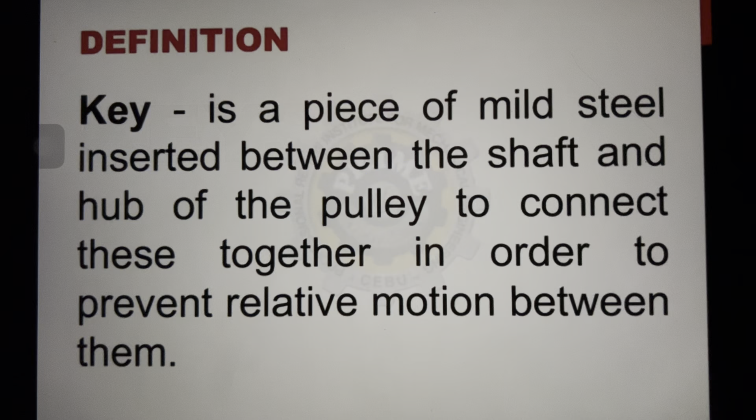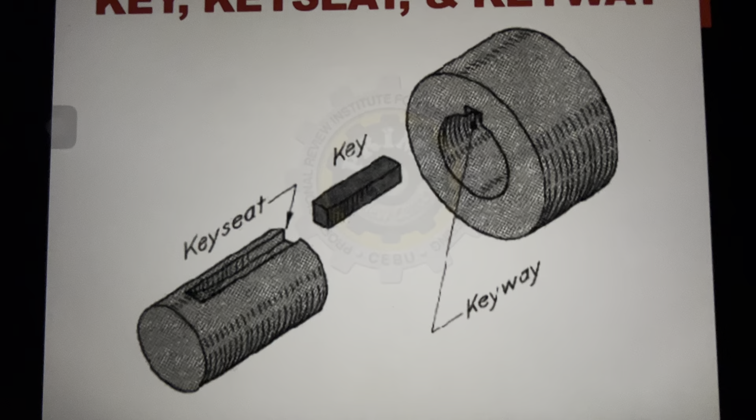By definition, a key is a piece of mild steel inserted between the shaft and the hub of the pulley to connect them together in order to prevent relative motion between them.

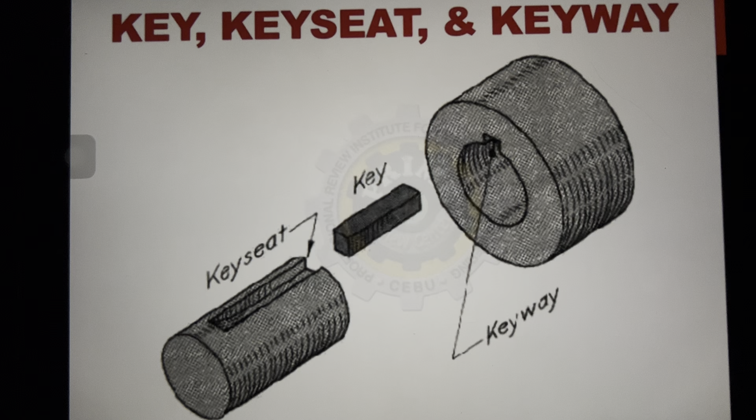So what does a key look like? Here we have the shaft, like this. And then we have here a pulley. So for us to have a connection between those two, we have a key, which is a small piece of steel.

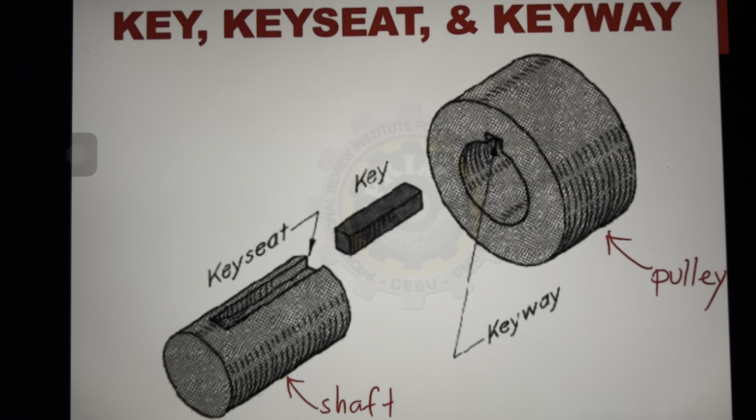Since our shaft key rotates, it is subject to torsion. If there is torsion or torque, there is force. If there is force, there is stress. So our key is subject to different kinds of stresses. Let's visualize those stresses.

First, the key is subject to shear stress. Since our shaft rotates, it is subject to shear stress. Let's show the shear stress on the key.

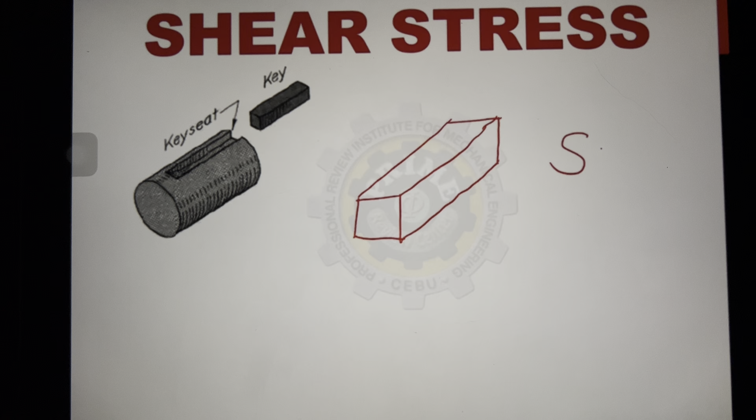Let's say this is our key, and of course, our shafting rotates. So we have stress, which is the formula of force over area. Our key is subject to a force, and here are the forces.

Of course, we know that for shear stress, our force acts parallel to the area. Our key has dimensions: this is the width, denoted as B, this is the thickness, and this is the length. So which area is subject to shear stress? The one that will be sheared will be parallel to the forces.

So that is our area parallel to the forces, and that is a rectangle. What is our area? The area will be length times width, which is the area to be sheared.

How do we get the force? We have torque, and torque is force times radius, which is 1/2 of the diameter. If we cross multiply by 2, the force becomes 2 times the torque over the diameter. Let's place this force and this area.

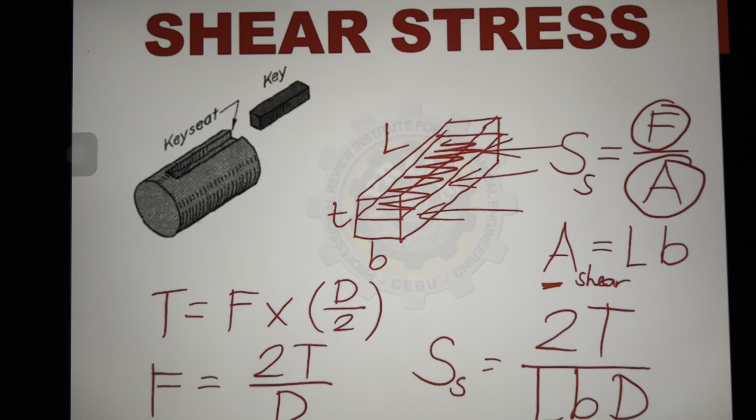Let's put this area here. So our stress will be the shear stress. The shear stress will be the force, which is 2T over D. And our area is L times B. So our shear stress for our key is 2 times the torque over L (length), B (width), and D (diameter of our shaft). This is our derived formula for shear stress, coming from force over area.

Normally, the unit of stress we use is megapascal or PSI.

How about the compressive stress? Since our key is placed in the keyway or key seat, the key gets compressed. What section gets compressed? Earlier we had shear stress. Another type is compressive stress. Again, we have forces here, and our compressive stress is an axial stress, meaning our force acts perpendicular to our area.

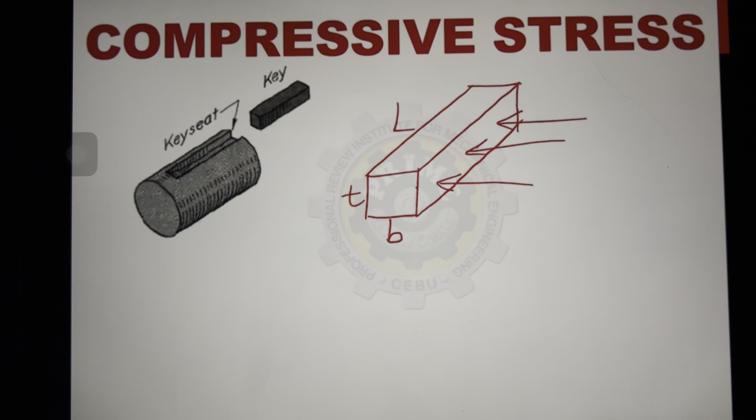Using the same dimensions, which section is compressed? Which part gets pinched, or which is subject to compression? This is it. What is that area? We put it in stress equals force over area. The area subject to compression will be this, still a rectangle.

What is this section? It is half of the thickness. So that is 1/2 times thickness times length. That's our area subject to compression: 1/2 times length times thickness.

And of course, we derived earlier that the force is 2T over D. So our compressive stress will be: what is our force? The force is 2T over D. And what is our area? The area is 1/2 length times thickness. So it becomes 2 divided by 1/2, which is 4. That will be 4T over L times t times D.

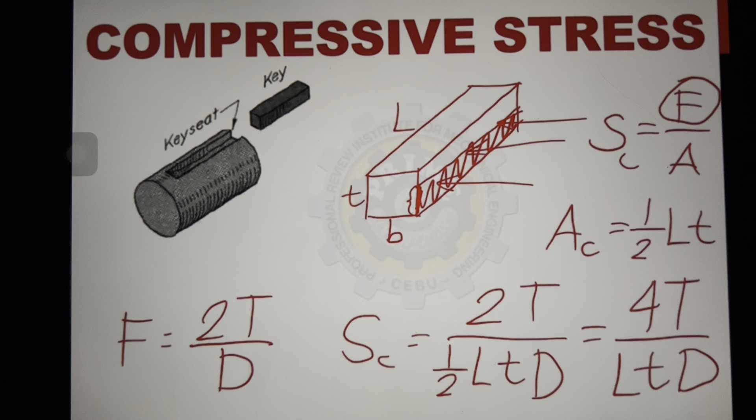That is our derived formula for compressive stress. Still, T is the torque, L is the length, the small letter t is the thickness, while the capital letter D is the diameter of our shaft. This is our compressive stress for the key.

So, let's remember these key calculations.

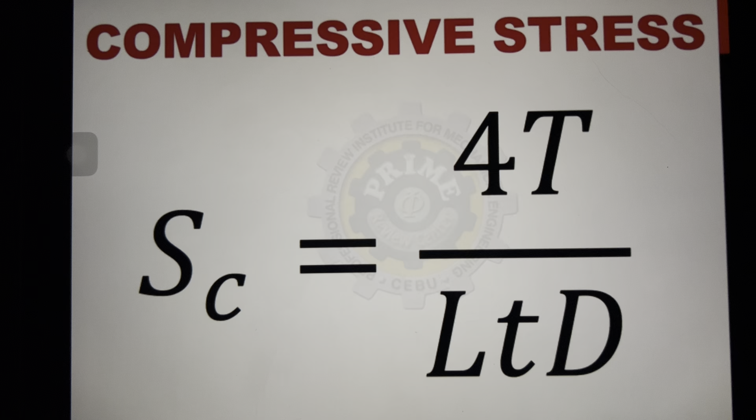Let's try these problems. A 4 inch shaft using a flat key whose width is 1 inch is transmitting a torque of 63,000 inch-pound. If the design shearing stress is 5,000 psi, find the safe length.

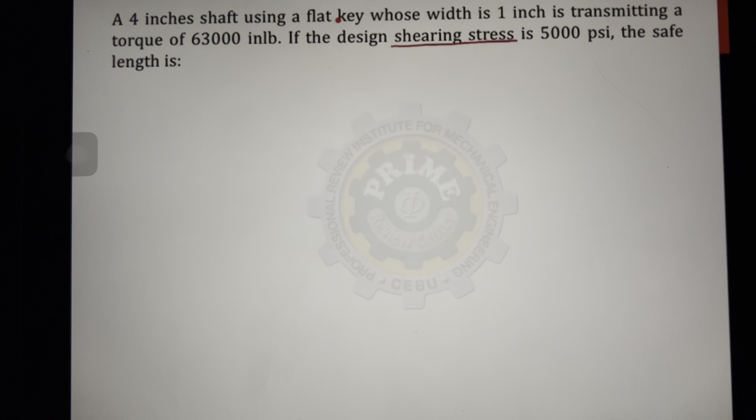So, given is the shearing stress for our flat key, and our formula is 2T over LbD. Let's plug in our given values.

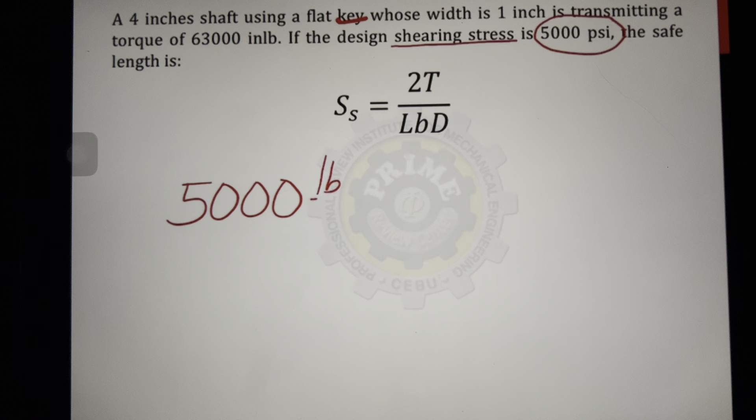Our shear stress is 5,000 psi, equivalent to 2 times the torque, which is 63,000 inch-pound, divided by the safe length, which is our unknown, times the width, 1 inch, and the diameter of the shaft, which is 4 inches.

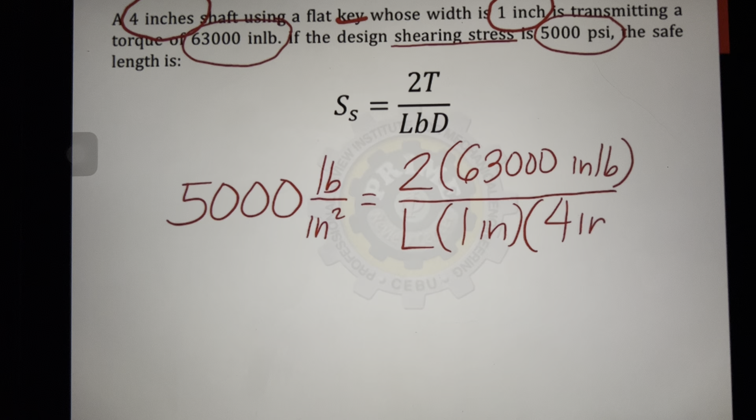Okay, so inch times inch, that is square inches, and pounds cancel. So our unit for length will be inches.

So what is the safe length of the key? It is equivalent to 6.3 inches. That is our answer.

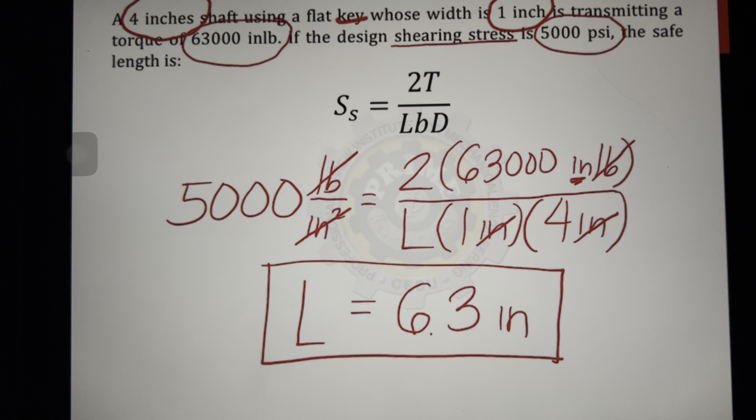Next problem. A 1,200 millimeter cast iron pulley is fastened to a 112.5 millimeter shaft by means of a 28.13 millimeter square key, 175 millimeters long. What force acting at the pulley rim will shear the key if the shear stress of the key is 20.67 kilogram per square millimeter?

Let's show the dimensions. So, let's start with our pulley, which is a cast iron pulley with a diameter of 1,200 millimeters, and of course mounted on it is our 112.50 millimeter shaft.

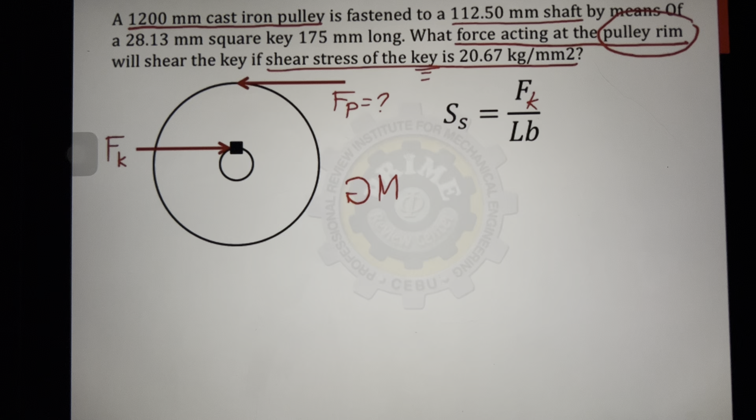So here we can use moment, since our pulley will rotate. So, summation of moment, assuming that all clockwise moments are positive, is equal to 0.

So what are our forces here? We have the force at the key. What is its rotation? It is clockwise here, so this will be positive. And what is our distance?

The distance will be the distance from the center. So how far is this force from our center? This is the radius of the shaft. So this will be the radius of the shaft.

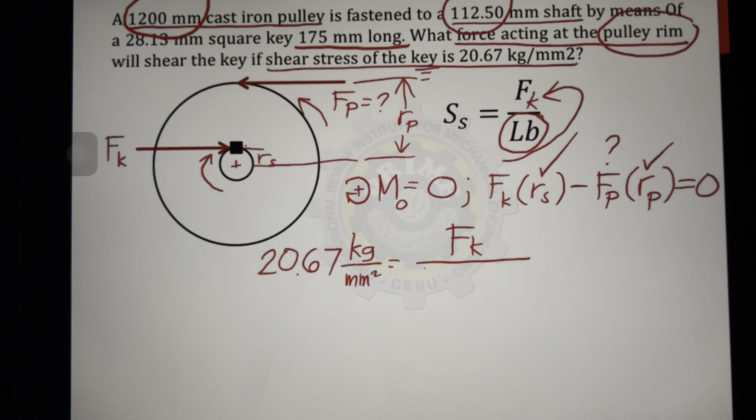So our length is 175 millimeters long multiplied by the width of the key, which, since it says it is a square key, is 28.13 millimeters. So for a square key, the width and thickness are the same, 28.13 millimeters. So millimeters squared cancel.

So our force acting at the key is equivalent to how many kilograms of force? This is equivalent to 101,753.24 kilograms. We can use the moment equation.

So, force acting at the key is 101,753.24 times the radius of the shaft. For the radius of the shaft, we were given the diameter of the shaft, so this is half. Half of 112.50, that is the radius.

And then minus force acting at the pulley multiplied by the radius of the pulley, which we can get here since this is the diameter of the pulley. So half of the diameter of the pulley, 1,200, that is the radius.

And equal to 0. So what is the force acting on the pulley rim?

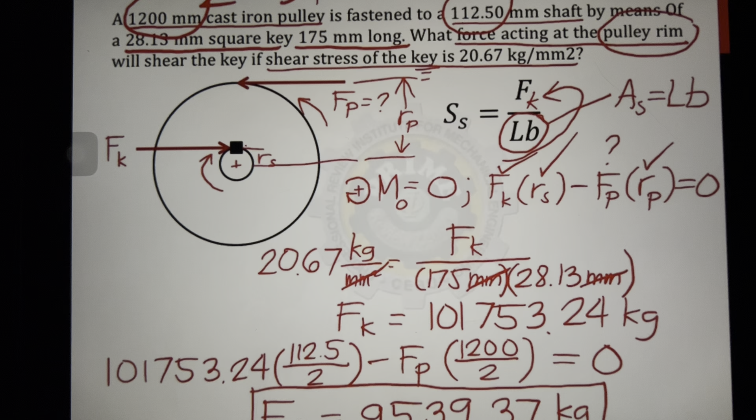Next one, a line shaft with a power of 100 kilowatts at a speed of 1,200 RPM had a rectangular key used in its pulley connection. Consider the shearing stress of the shaft to be 40 megapascal and the key to be 200 megapascal. Determine the width of the rectangular key if it is 1/4 of the shaft diameter.

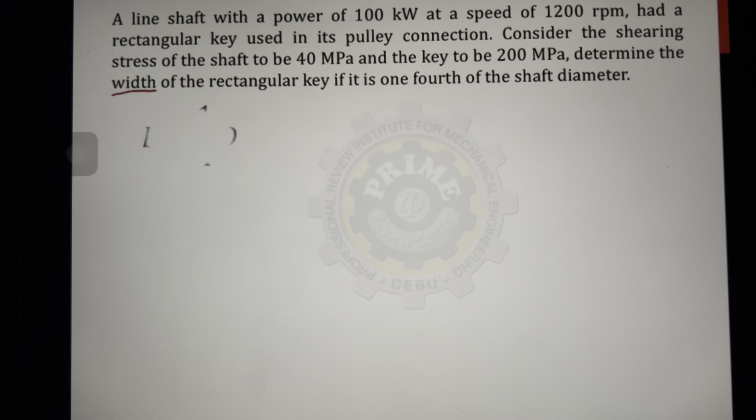So nawawala ay width of the key, which is denoted as B. The size of problem, it is 1/4 of the shaft diameter. Or in equation form, this is B is equal to 1/4 D.

So para masolve ang width, kailangan ko masolve ang diameter. Kasi doon naka-depende ang measurement ng ating width of the rectangular key, 1/4 of the diameter. So saan ko pwede makuha ang diameter ng shaft? Of course, sa stress ng shaft, which is 16T over pi d cube.

So pag nasolve ko ito, masosolve din ang ating B. So dependent ang B sa diameter. Meron ba tayong given na stress ng shaft? Yes, the stress is 40 megapascal. Nawawala ang T, so kailangan ko ng torque.

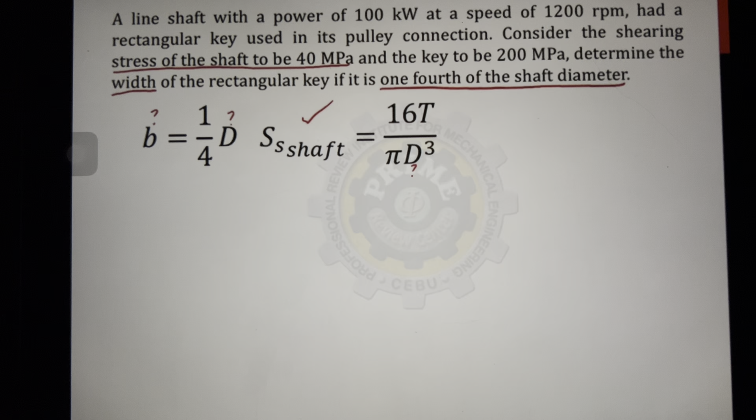So saan ba natin nakukuha normally ang torque? Sa power. Given power of 100 kilowatts and speed of 1,200 RPM, masosolve natin ang torque. So kumain natin isolve ang ating torque. So our power in kilowatt is 100.

Equivalent to N na 1,200 RPM times torque over 9.549 times 10 to the 6. So what is the torque in Newton millimeters? It is equivalent to 795,750. That's Newton millimeters. Since meron ng torque, pwede ko lang gamitin ang shearing stress sa shaft, which is 40 megapascal or Newton per millimeter squared.

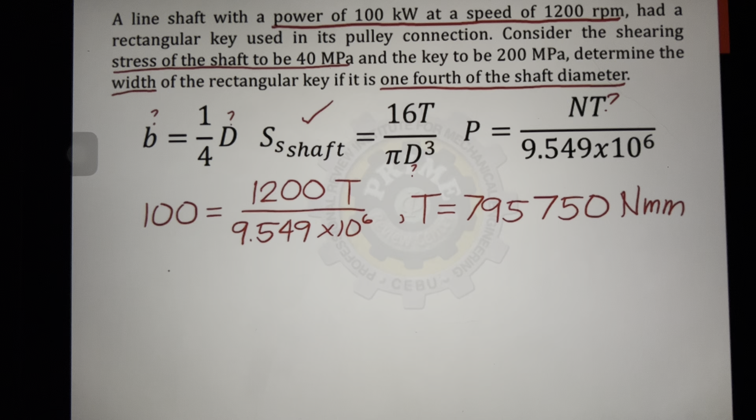It's equivalent to 16 times the torque of 795,750 Newton millimeter divided by pi d cube. Cancel ang Newton, so mm squared times millimeter, that will be millimeter cube. And since ito ay d cube, so cube root of mm cube, that will be millimeters.

So what will be our diameter in millimeters? It is equivalent to 46.62 millimeters. At ngayong meron tayong diameter, pwede ko lang masolve ang width of the rectangular key. And that is 1/4 of the shaft diameter, 46.62.

So what is our width? It is equivalent to 11.65 millimeters.

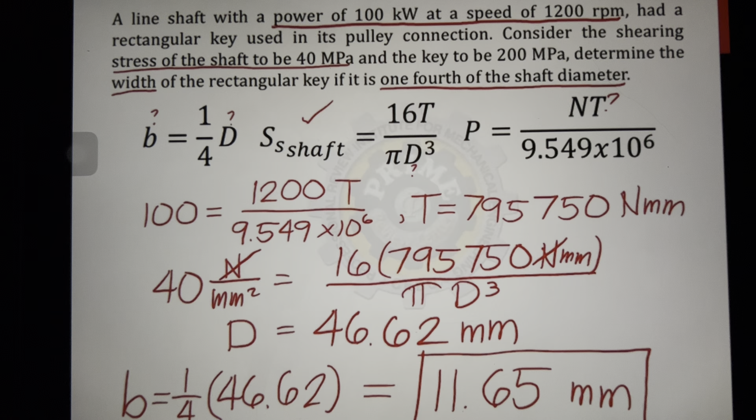Next one, a solid steel machine shaft with a safe shearing stress of 7,000 psi transmits a torque of 10,500 inch-pound. A square key is used whose width is equal to 1/4 of the shaft diameter and whose length is 1 1/2 times the shaft diameter. Find the key dimensions.

So nakita natin mga dimension, which is, ano ba mga dimension ng key? So yun yung width, thickness, and length. So yun ang hanapin natin, yung measurement ng dimension ng key natin. So ano ba mga given?

Una, sabi sa problem, the square key has a width equal to 1/4 of the shaft diameter and length of 1 1/2 or 1.5 times the shaft diameter. So napapansin, ang ating width and length ay pareho nakadepende sa diameter.

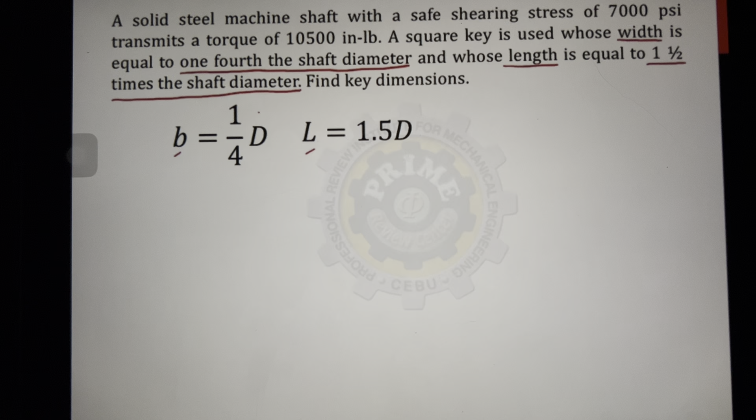So again, ang ating shaft ay may binigay na safe shearing stress. So doon natin kukunin ang ating diameter of the shaft, which is 16T over pi D cube. Meron tayong shearing stress of 7,000 psi and a torque of 10,500. Masosolve natin ang diameter. At once masolve ang diameter, masosolve na rin natin ang width and length.

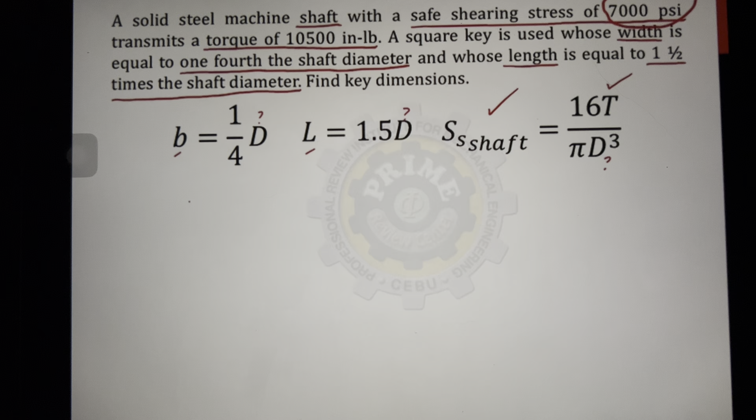So start tayo sa shear stress ng shaft, which is 7,000 psi. Equivalent to 16 times the torque over pi D cubed. Cancel ang pounds, this will be inches cubed. So ang diameter natin ay naka-inches.

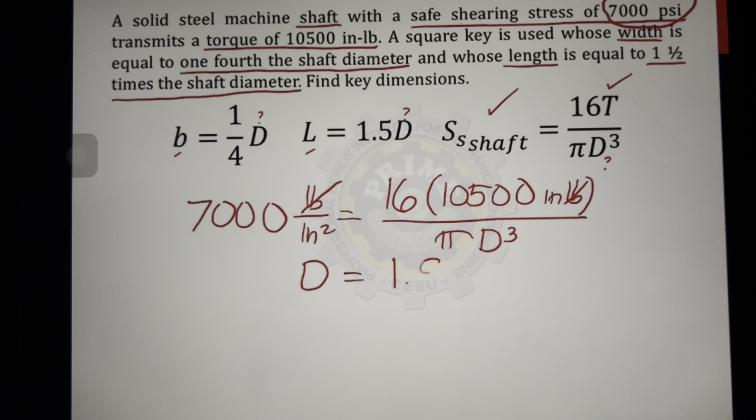So what is the measurement of our diameter of the shaft in inches? It is equivalent to 1.97 inches.

So pwede natin makuha ang width as well as the length. So our width is 1/4 of the shaft diameter, which is 1.97. So ang width natin ay 0.49 inches.

So yan ang dimension ng ating key. Pero alam natin, normally, ang mga dimension, nakadepende yun sa available na sizes of our material. So ano ba yung closest na available sa market size sa 0.49 inches? Alam natin na ang closest na available ay 0.5 o yung 1/2 inch. So yung dimension ng ating key at the width of our key is approximately 1/2 inch.

And another thing, ano sa problem? Ang key na to ay isang square key. So kapag square key, ang ating width ng ating thickness ay iisa. So yan ang cross-section ng ating key. So the width is equal to thickness. So yung 1/2 inch, yun din ang measurement ng thickness natin.

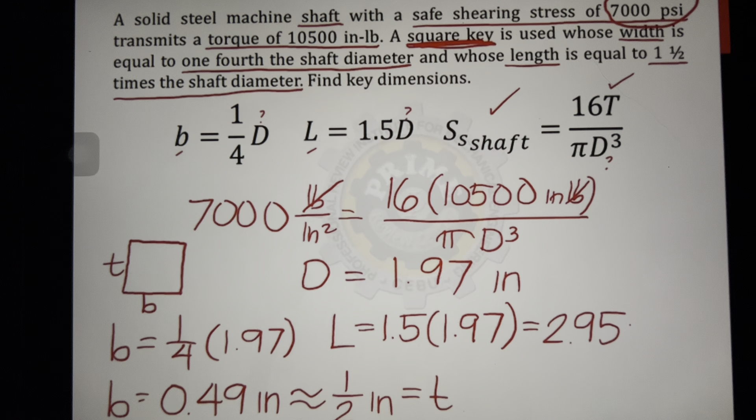So pinakamalapit sa 2.95 ay 3 inches. So meron tayong mga dimension. Start tayo sa width, which is 1/2 inch. And the thickness, also 1/2 inch. And the length is 3 inches. So yan ang dimension ng ating key.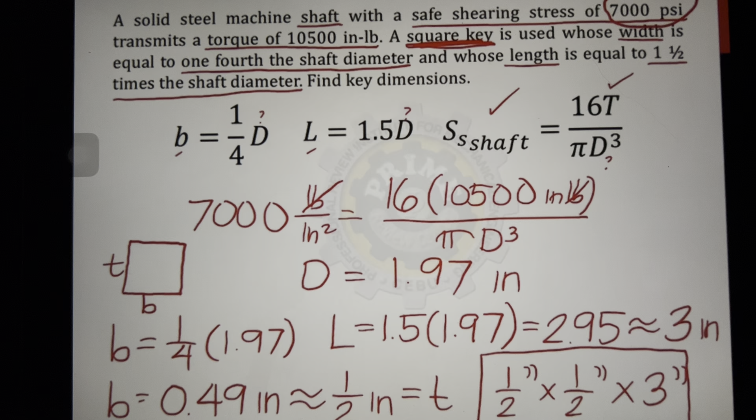Next one, couplings. So what are couplings? Couplings are used in machinery for the connection of shafts of units that are manufactured separately, such as a motor and a generator, and to provide for disconnection for repairs or alterations.

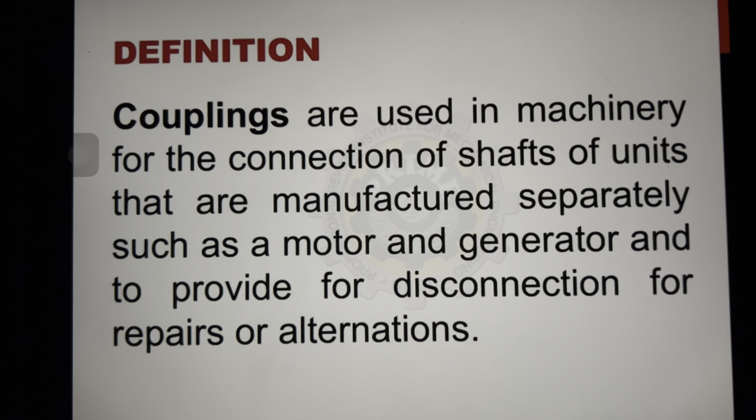Our first one is the shear stress on the coupling bolts. Ano ba yung coupling bolts natin? Let's say this is our flange, ito ang ating shaft, at ito ang ating mga coupling bolts. Kapag umiikot yung ating coupling, subject yan sa stresses.

Start with our shear stress. Alam natin na ang stress formula ay equivalent sa force over area. Since pinag-uusapan natin ang shear stress sa bawat bolt, ito ay magiging force acting at each bolt divided by the area of each bolt.

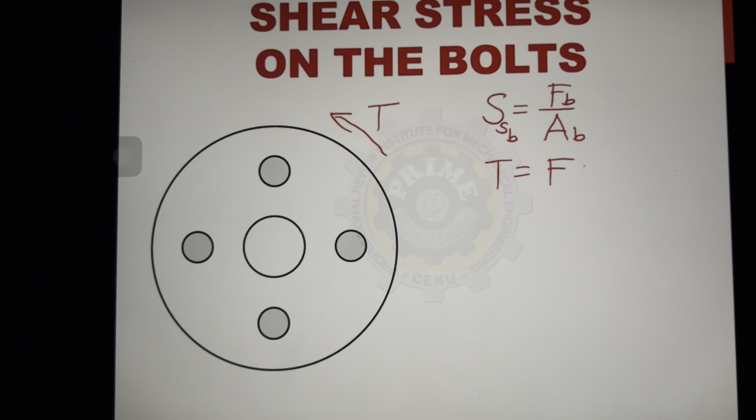I-derive natin. Since umiikot ito, it is subject to torsion. Alam natin na ang torque ay force times radius, o 1/2 ng diameter. Ano ba itong force?

Since umiikot ito, na-apekto lahat ng bolt, kaya ito ay total force acting at the coupling. Ang diameter naman dito ay ang diameter na nag-act sa lahat ng bolt.

Tandaan, ang ating mga bolt ay may sinusunod na imaginary circle, tinatawag na pitch circle o bolt circle. Itong diameter dito ay ang bolt circle diameter, ito yung broken line natin — yan yung ating bolt circle, ang imaginary circle na sinusundan ng ating mga bolt.

Dito, our total force is equivalent to 2 times the torque divided by the bolt circle diameter.

Makakapansin tayo, meron tayong force per bolt at total force. Sabi natin na ang total force ay force sa lahat ng bolt, so paano ko makukuha ang force sa kada isang bolt? Gagawin ko lang, yung total force natin i-divide ko sa number of bolts.

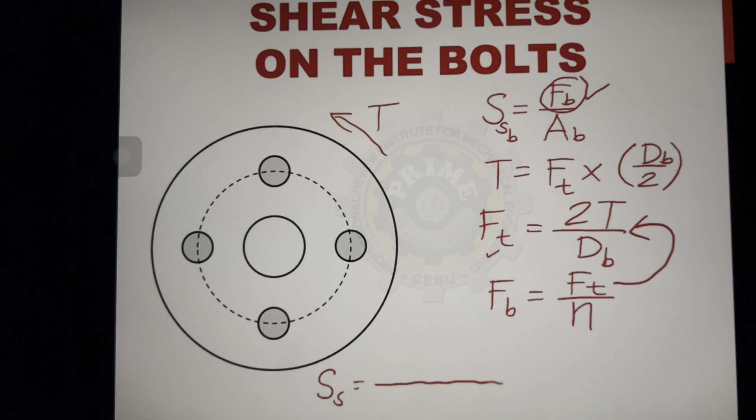Ilagay na natin sa ating shear stress formula. Ang shear stress, equivalent sa force per bolt, ay equivalent sa total force over N. Ano ba ang total force? Ito: 2T over bolt circle diameter, tapos meron tayong nakadivide na N. Yan yung ating force per bolt.

Ano naman ang area ng bolt? Kunin mo ang area ng bawat isang bolt, magiging circle ito, which is pi over 4 times the square of the diameter of each bolt. I-denote natin as small letter d, yun ang diameter of each bolt. So ano ang ating derived formula?

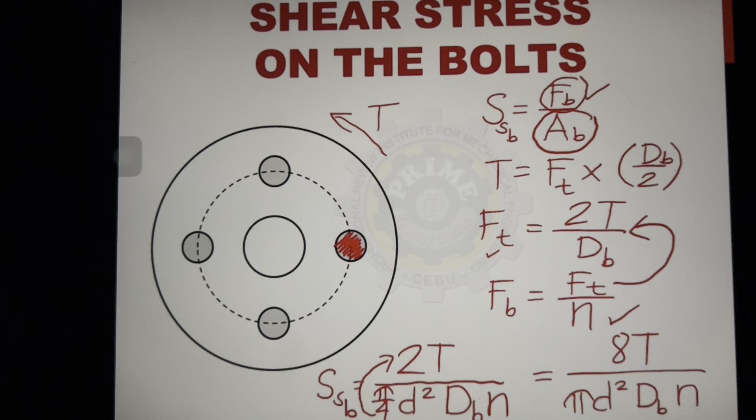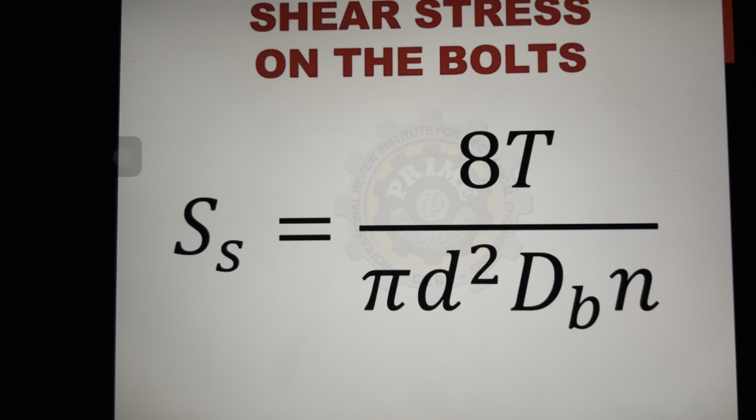Yung over 4 dito, tataas dito, kaya magiging 8T over pi d squared dB times N. That is our shear stress of the coupling bolts, where T is the torque, small letter d is the diameter of each bolt, d sub b is the bolt circle diameter — ang diameter ng imaginary circle na sinusundan ng ating mga coupling bolts, at n ang number of bolts.

Ito naman, subject sa compression. For the compressive stress on the flange, that is 2T over dt times Db times N, where small letter t is the thickness of the flange.

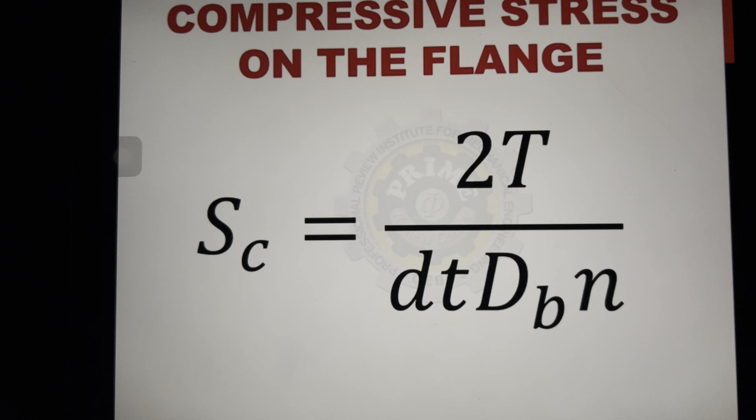Ito ang nawawala. We have a derived formula na equivalent sa 8T over pi d squared dB times N — that's the shear stress of the bolts. That will be 8 times our torque, kung saan meron tayong torque of 120 Newton meter.

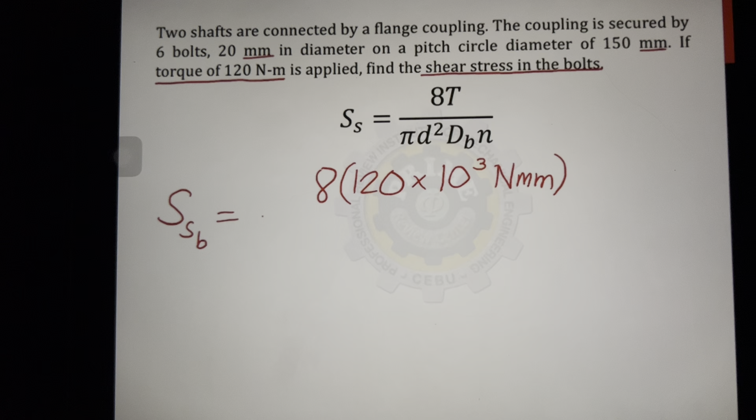Kaso napapansin na ang ating mga dimension ay naka-millimeter, kaya yung Newton meter para maging Newton millimeter ay i-multiply natin ng 1,000, so 120 times 10 to the 3 para maging Newton millimeter. Sanayin natin, kapag tayo ay naka-SI, ang force ay Newton, ang dimension ay millimeter, ang torque ay Newton millimeter, para maging stress ay Newton per millimeter squared o megapascal.

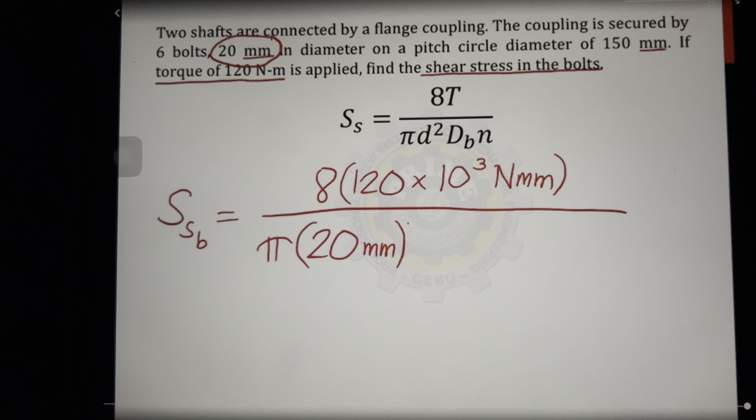I-divide natin sa pi times small letter d, ang diameter of each bolt, which is 20 millimeters, then i-square, times ang bolt circle diameter, which is the pitch circle diameter of 150 millimeters, at N is the number of bolts — sabi dito, there are 6 bolts. I-cancel ang millimeter, so magiging Newton per mm squared o megapascal — yan ang shear stress in each bolt.

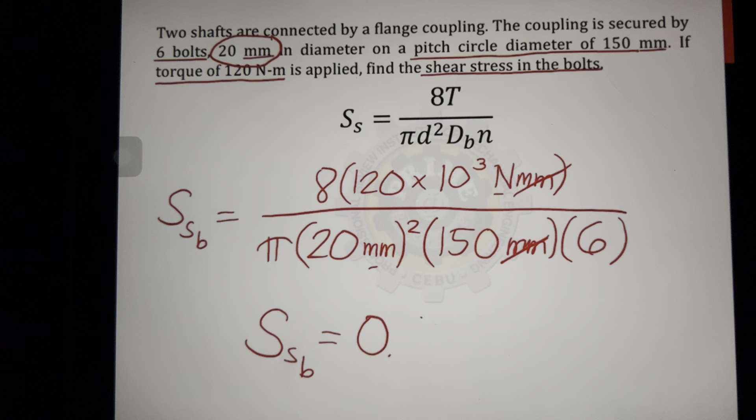It is equivalent to 0.85 megapascal.